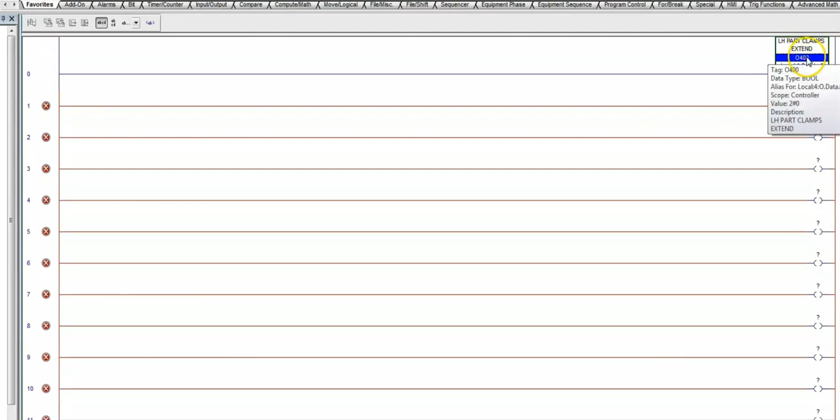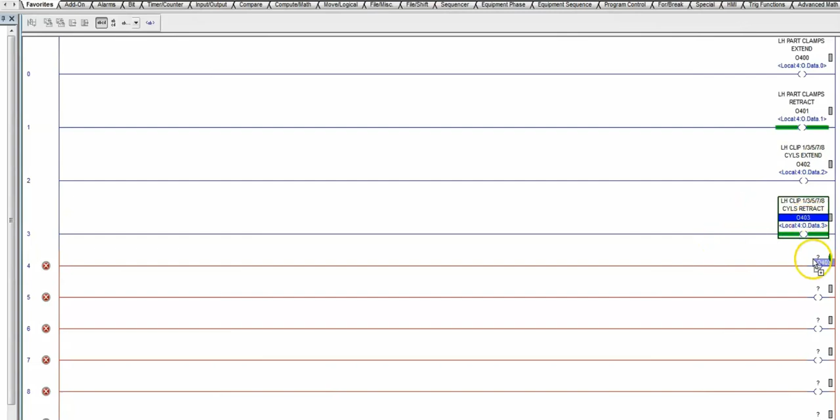The next thing we want to do is we want to address our outputs. And since we've addressed these sequentially, that makes the job that much easier. I've gone ahead and sped this up.

So the next thing we want to take a look at in our program is the first instruction on the first rung 0. So what do we need to consider for the very first rung? Well, let's go ahead and go into our projects tree and go to our main routine.

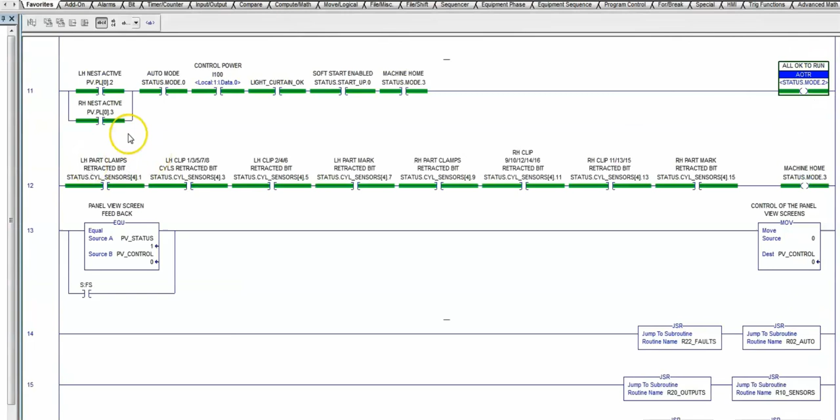And in our main routine, we have a lot of information, but we're only interested in the very beginning, where we get our power. So we have our power control input and a soft start enabled. We should begin here.

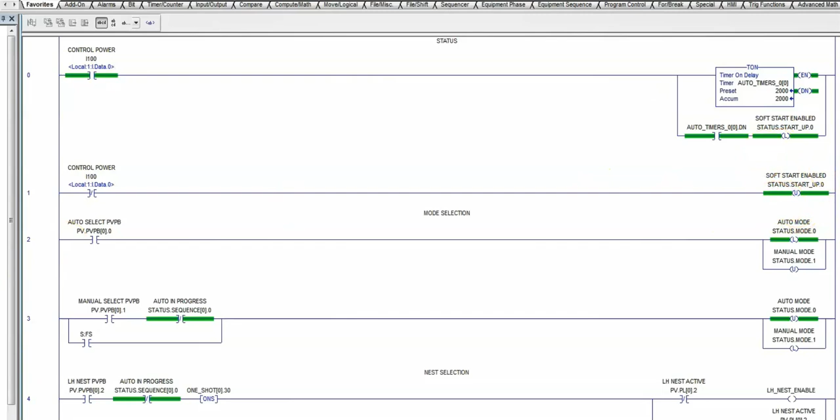The reason for that is that this soft start enabled controls all of the outputs. We will have control power to our processor and throughout our control panel, but without this input we will have no power to energize our outputs.

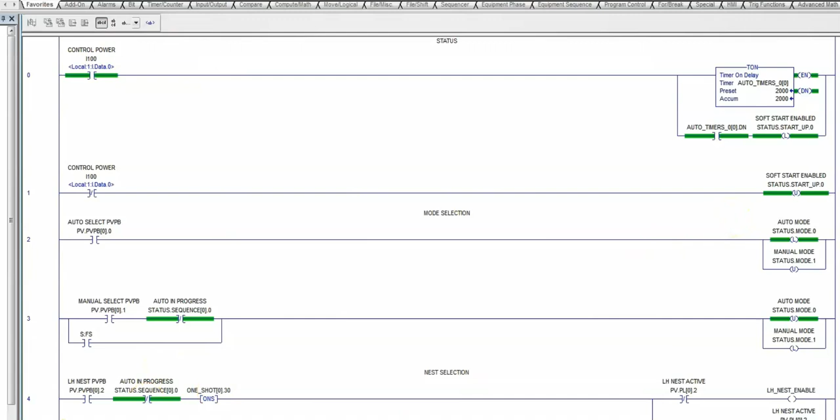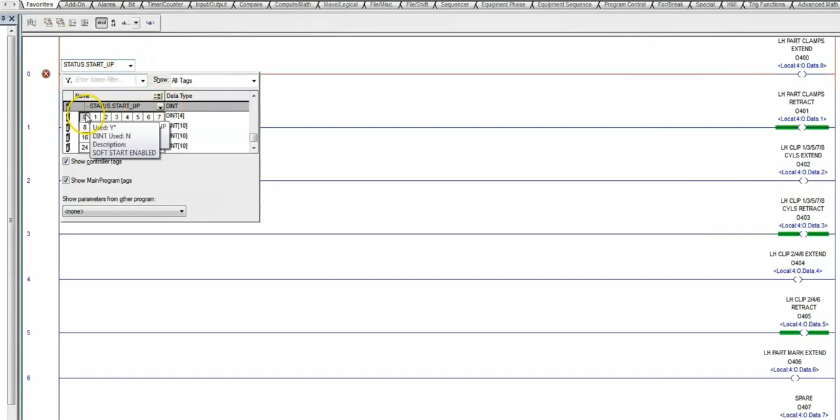So let's go back to our outputs routine and let's put in an instruction here. That is a status startup. Alright, let's find our tag, status.startup 0. Okay, that's the first one.

Now, as we've identified that is an important instruction, it will determine our ability to energize our outputs. That is the instruction that we will need on all of our rungs. So we will copy that instruction and paste it to all of our rungs.

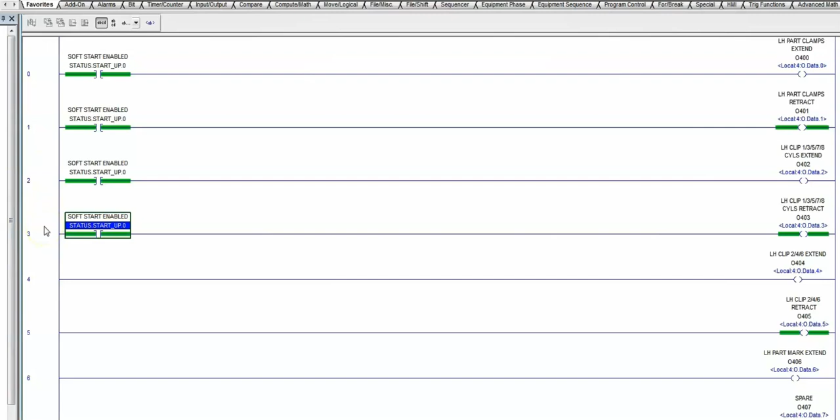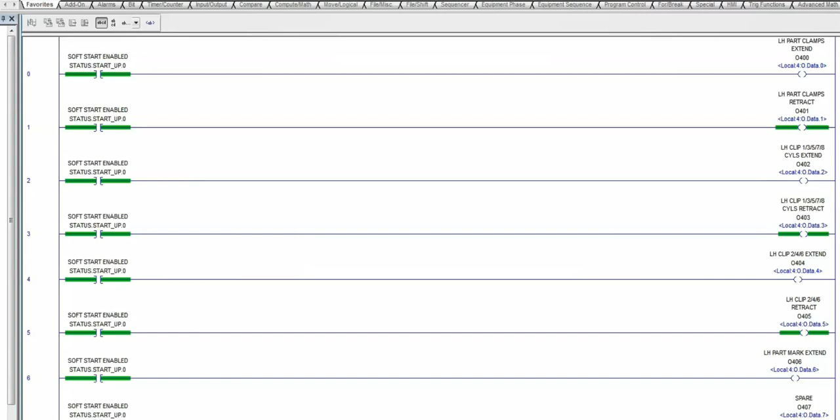Now I want to take this moment and share with you that the way that I'm building this routine is based solely on the fact that I am also trying to instruct you on how I would build this outputs routine. There are many ways to do it, and to be very efficient it would possibly be done differently. But I want to go instruction by instruction, rung by rung, and explain the thought process that goes into building your outputs routine. So let's get back to it.

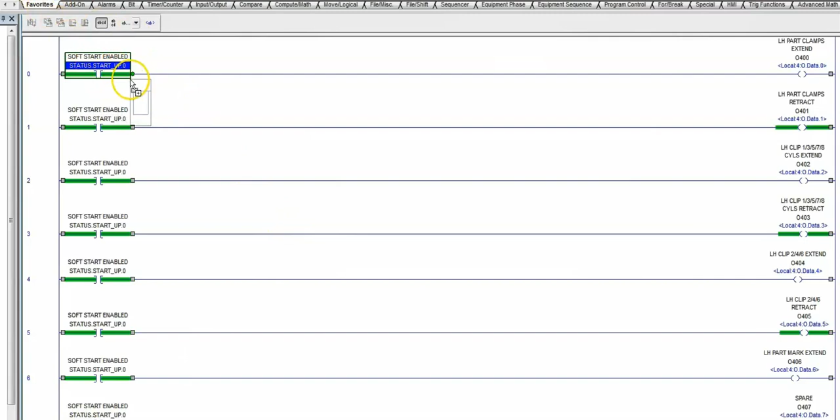Now the next very important instruction, what would that be? Well, we need to understand our machine. Let's begin by considering that we have an auto and a manual cycle. So let's go ahead and put in our manual. And that I happen to know would be PV, PL.

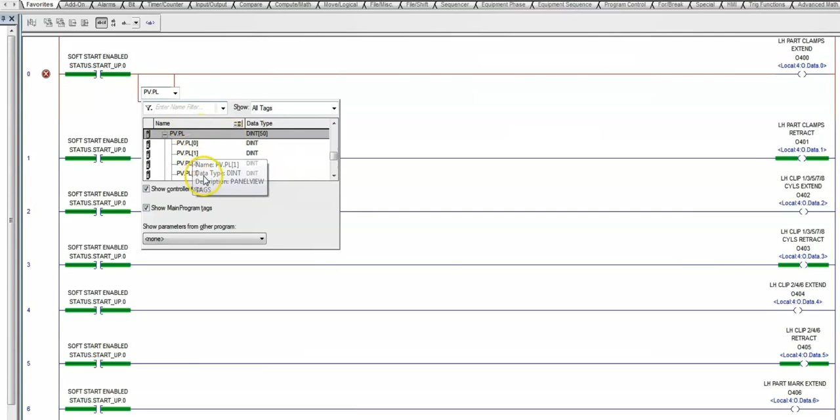This is a status bit that lets me know if the manual extend bit has been energized. Let's go with 4, 0.

Okay, what this is saying is, without adding any other instructions, assuming that this first rung is an auto rung, and we will build it to be so, that if it's put in manual, we can manually energize that bit, and another part of the program in the manual routine will energize it, and then we'll be able to manually extend this clamp. All right, so this is our manual bit.

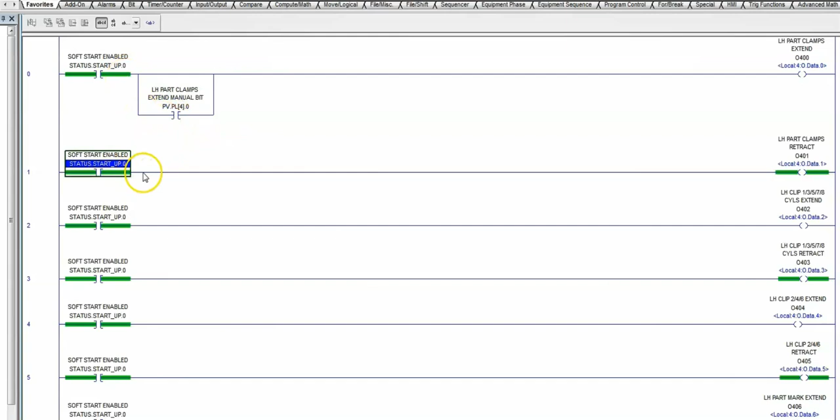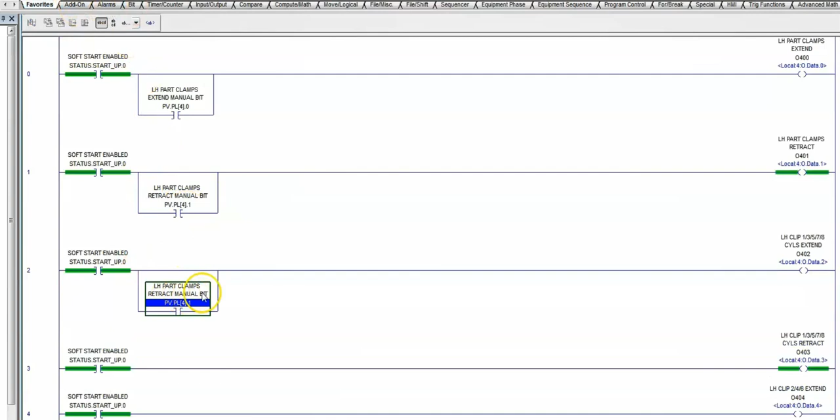This is our manual branch. Therefore, it would be safe to assume that we would have the exact same instruction in each of our rungs. Pay particular attention to the numbering scheme that is used.

I've gone ahead and sped up the process and programmed all of the manual instructions into our routine. Now, the next consideration is that we need to make sure that our left-hand nest is activated. We have made a decision to use the left-hand nest.

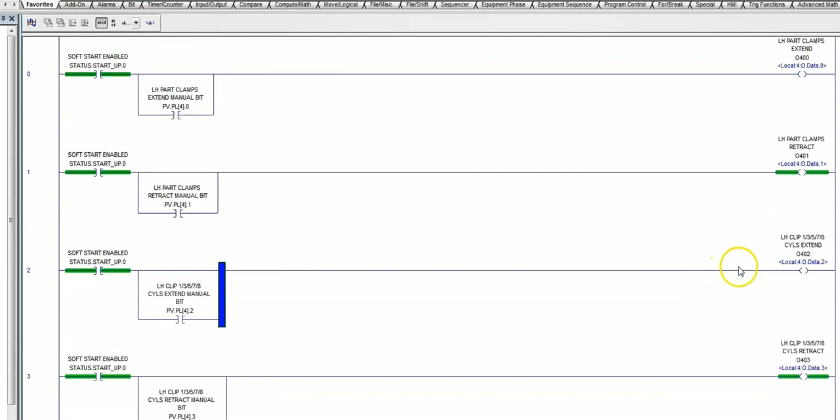All right, you'll notice that in our instructions, as you recall, we have two nests, a left hand and a right hand. So let's go ahead and get our instruction for our left hand nest. And what we're going to be looking for is our status bit for the nest. We're going to have 0.2, and that's our left hand nest is active.

Okay, now that we have our left-hand nest active, this is an auto rung, and this next section is very critical to understand, and that is that we want to only run our AutoCycle. Well, we want to run our AutoCycle in specific conditions.

Okay, one of them is we only want to extend our clamps, which is clamping the part and holding the part, when it's given the instruction in the auto sequence. So if you have considered what your auto sequence is, let's go take a look at that. Want to make sure that we're in the sequence to close the clamps, all right? And that would be all of these rungs' conditions have been met, and it's sequential.

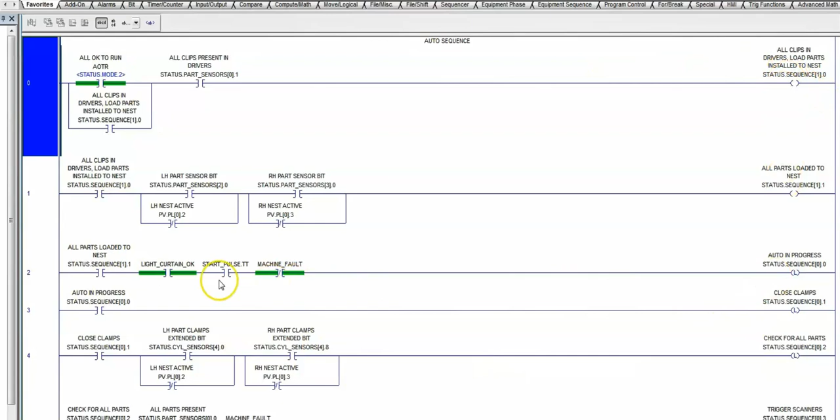We're using a status sequence latching bit to manage our auto cycle. So once this auto is in progress, that has gone high, and then we are able to close our clamps. So we want to be very cognizant of our auto cycle conditions. So let's go back to our outputs. So before we extend these, we need to make sure that our status sequence is to close the clamps.

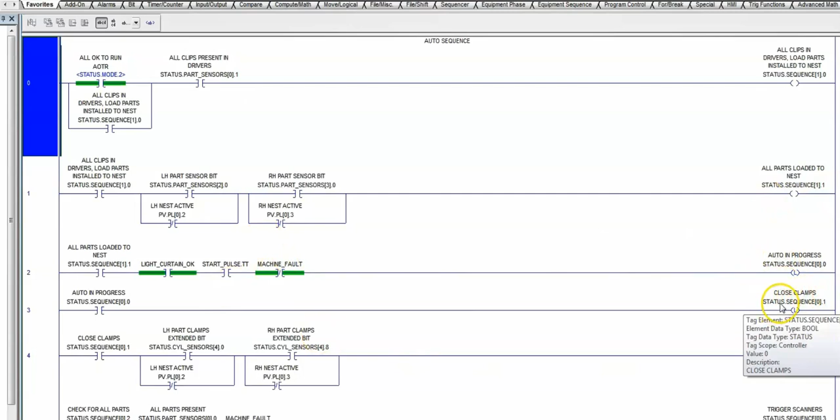And if we look back on our auto instruction, closing the clamps is right here. This is the instruction that we need to make sure that that status has been met, that it's high, before we permit this output to be energized. So let's go to status.sequence, and we'll go 0.1

and close the clamps. Now, it needs not to have been given the instruction to open the part clamps. So we have a condition so that we have closed clamps, but do not have an instruction to open the clamps. So it will stay closed until the sequence to open the clamps goes high. And we'll take a look at what that means.

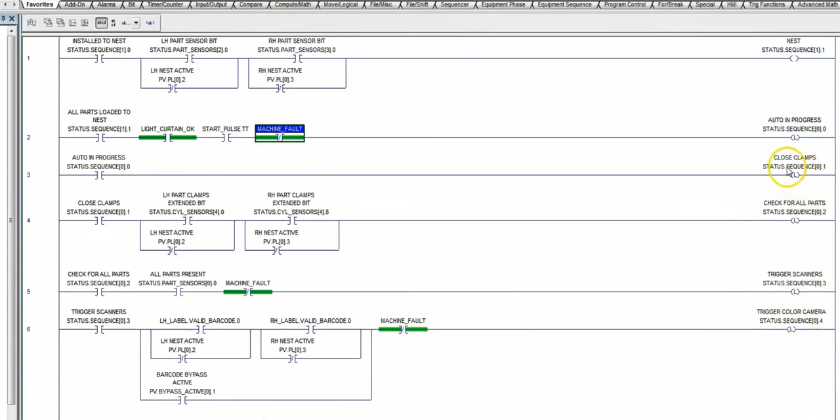If we go back to our auto routine, we have our closed clamps. The next sequence we need to consider is, when does it tell it to open the clamps? When we're all the way through all of this sequencing down here at rung 19, it says open the part clamps.

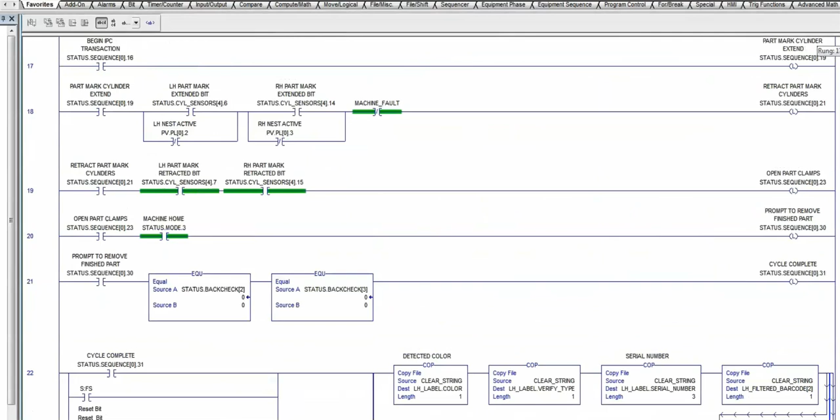All right, so we want that to be energized all the way through all of these instructions, all the way down to this routine here, where in the sequence we have completed the AutoCycle and we are now telling the clamps to open. When that happens, we want to release this clamp, okay, and permit it to open.

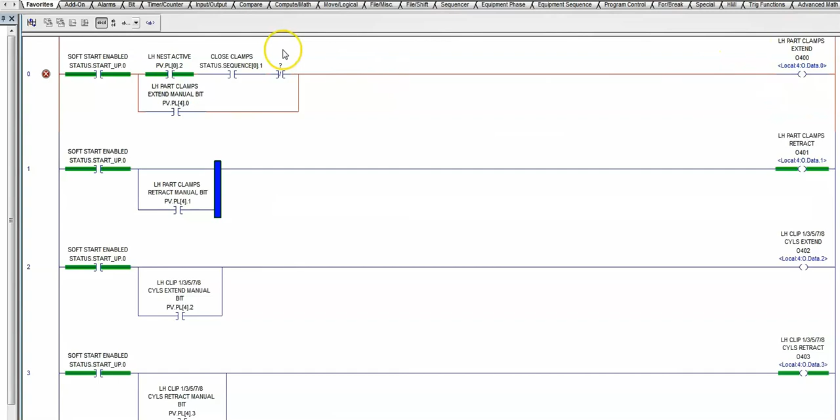So we need to go to 23. Okay, so it needs to close when we are at that part of the sequence to close, and then open when we are at this part of the sequence to open. This auto rung here is based solely on the auto routine.

Okay, and now when we look at it, we have our manual instruction down here. So now we have our auto and our manual, but are we still missing something? And I would say indeed we are. What we're looking for next is something I normally want to consider first, and that is safety. So when we are cycling our machine, whether in auto or in manual, there are a couple of things we need to consider.

In this case, we have a light curtain, which is our primary safety feature beyond the e-stop. And that would be something we need to consider. In the manual cycle, if we're manually cycling the machine, this clamp, would we want to permit the light curtain to be broken? No. What about in an auto cycle? No. But that by itself isn't always enough.

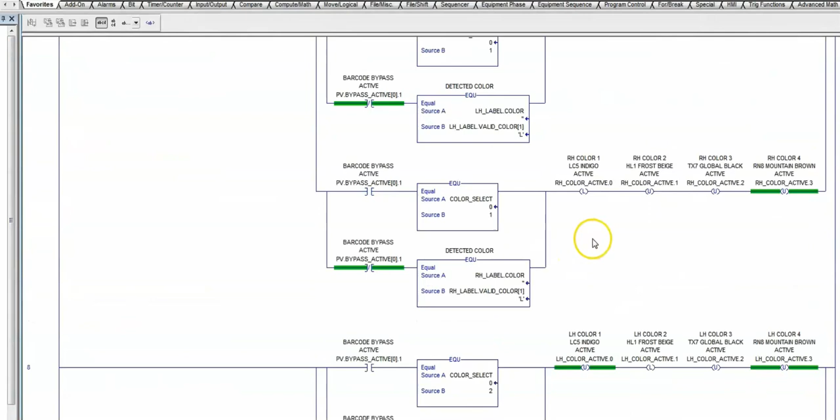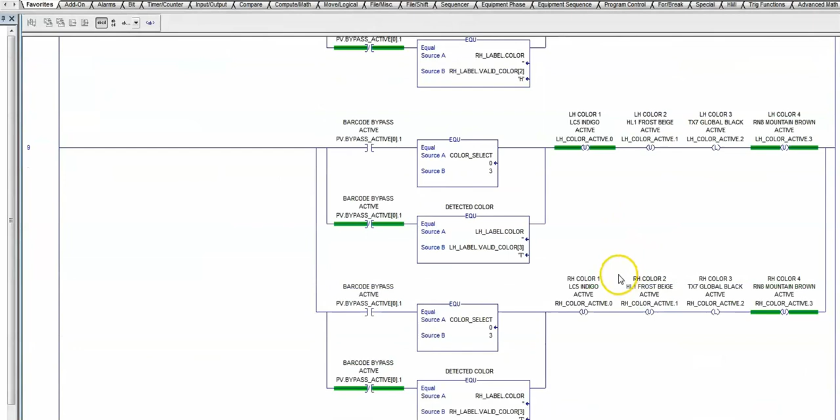So let's go to our main routine. And in our main routine, we have a rung that's called everything's A-OK or all okay to run. Let's find that routine. And that routine carries a lot of weight throughout our cycle.

Okay, obviously for everything to be okay to run, we need to have chosen one of the nests, and by default, up above on one of the other rungs, we automatically, on the first scan, choose both. You have to manually choose one of the other ones in order to not have both of them. So again, by default, we are choosing both left and right hand nest. One of them must be chosen for everything to be okay to run.

We have an auto mode. Okay, now this could also be referred to as everything okay to run in auto. We have our control power, which means we have power to our outputs. We have the light curtain, that's okay. We have our soft start enabled, and we have our machine is home.

All of the cylinders are in a home position. They are not extended or retracted. Well, depending on the application, it may need to be extended versus retracted. But in this case, all cylinders are retracted as they are supposed to be.

Okay, so what we need to look at here is a lot of these conditions. If we go to put it in manual mode and I pulled off of all of these conditions, I wouldn't be able to manually move it because it would need to be in auto. All right, the light curtain is okay, meaning it's not broken. Okay, so these are some of the considerations you need to consider.

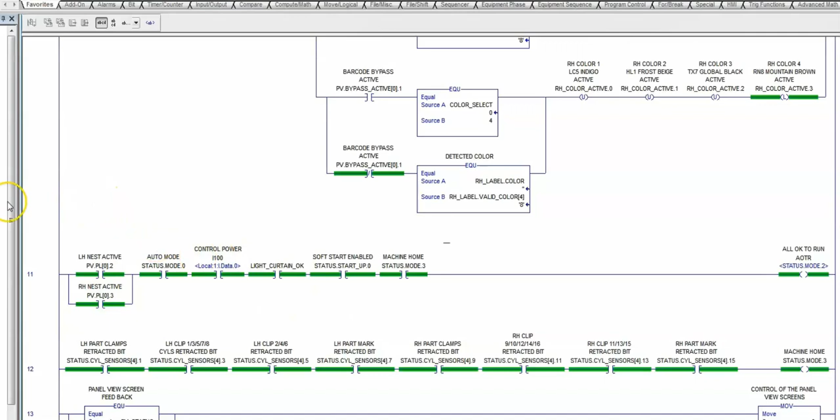If all of the cylinders are not home, and the way we would know that is we would have our inputs indicating that they're all home, then we wouldn't be able to manually move them at all, even in the retract. So if they're not home, we cannot use this, and we need to consider exactly what we need to add to our output rung to consider safety.

So an item to consider is the light curtain. Okay, we don't want the light curtain to be broken. We don't want anybody within the light curtain or within the safe space of the machine, whether it's in manual or in auto, and that's an irrevocable fact. For manual and auto, that's something we definitely want to consider when we're writing our program.

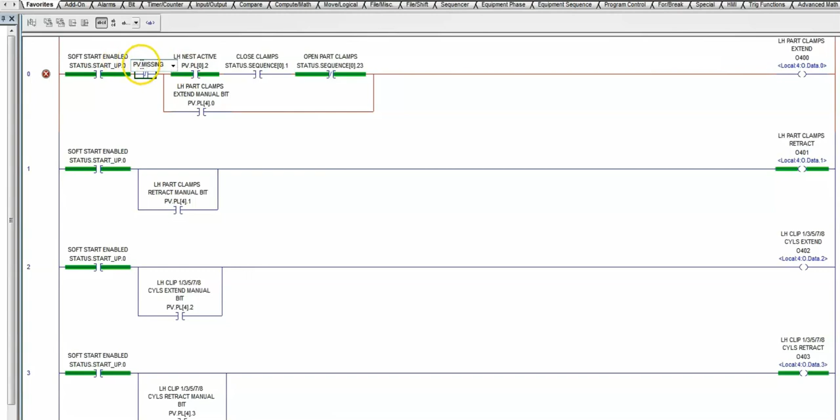PV missing. All right. PV missing. We got 1.1. And there we go. So that's a condition we want to have. Now, when you think of all the other conditions that I outlined, light curtain is very important. We have our soft start, so we have our power to energize our outputs.

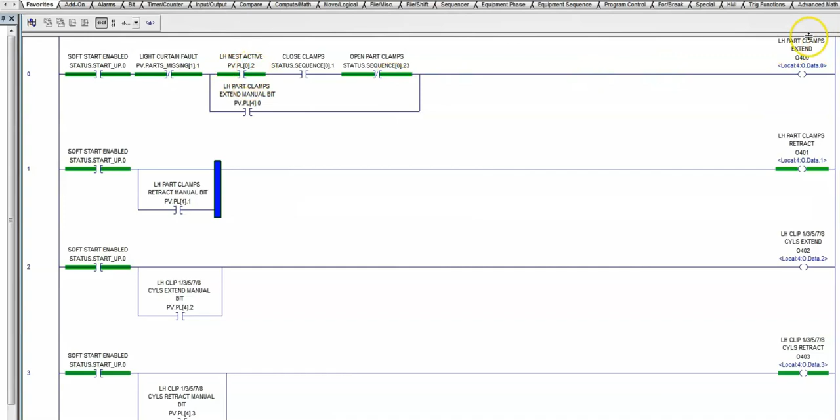We have an irrevocable safety condition, whether it's in auto or manual. We have our left nest has been chosen. That's important because it's a left part clamp. In this top rung, we're dealing with our AutoCycle, so between 0.1 and 0.23, we want this fully energized in the auto routine, and or we drop down here and we can manually energize it. There is the thought process for this first rung.

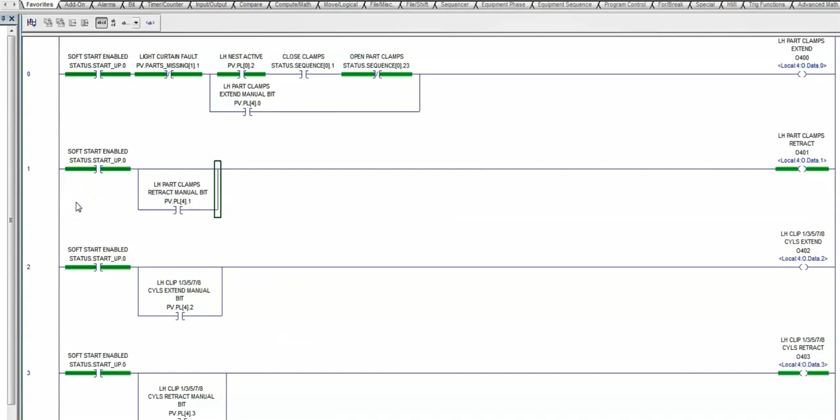Now I'd like to walk through the second rung. And then what we will find is all the subsequent rungs will essentially be the same as these two rungs, because all the rest of them have an extend and a retract. As we have here, left-hand part clamps extend, left-hand part clamp retract. And we have the exact same thing for every cylinder as we move through.

What I wanted to share with you primarily today is the thought process behind writing this routine. So let's go ahead and get started. So now obviously we're back to our light curtain condition. Okay, that must be there. Now, to retract it, right? To retract is a different thought process to a degree than extend.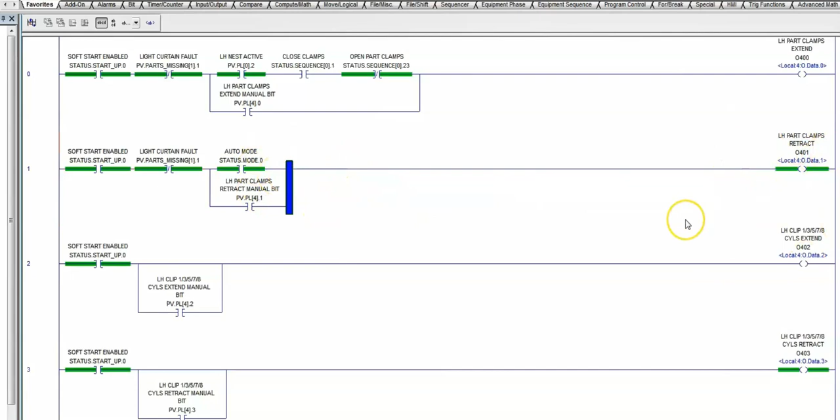And that is, we have our manual mode here, right? But we also need to say, hey, you need to be in the auto mode to be able to retract this. And we'll talk more about that in a minute. All right. Okay, so now, in the auto mode, the next process really is thinking about what is the condition that will require us to retract the clamp, okay?

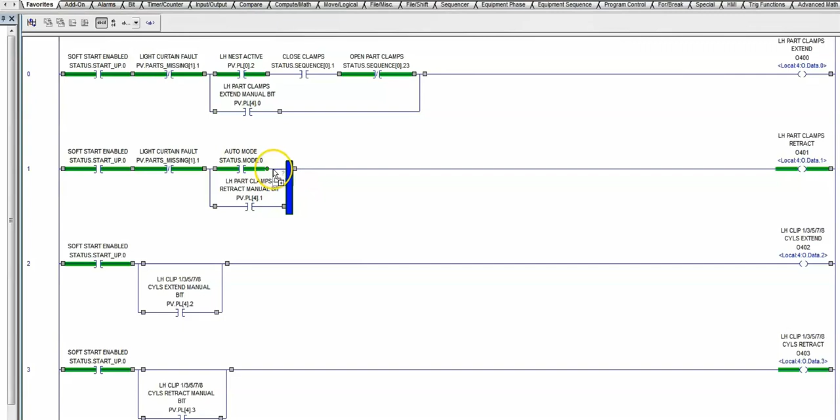So one, it needs not be energized, extended, right? So we want to put that in here, right? And we want to say, hey, if it's extended, do not retract. Now, for it not to be extended, we need to not be in either of these two conditions here, okay? Very important.

In the auto cycle. In the manual here, this is a momentary button. This will only energize as I am pushing the button. When I let go of it, it will then de-energize this output. Now here, I want to make sure this is de-energized before I go to retract. If it's in auto, in between these two, and I go to manually retract it, I'll have the cylinder fighting itself. I hope that makes sense.

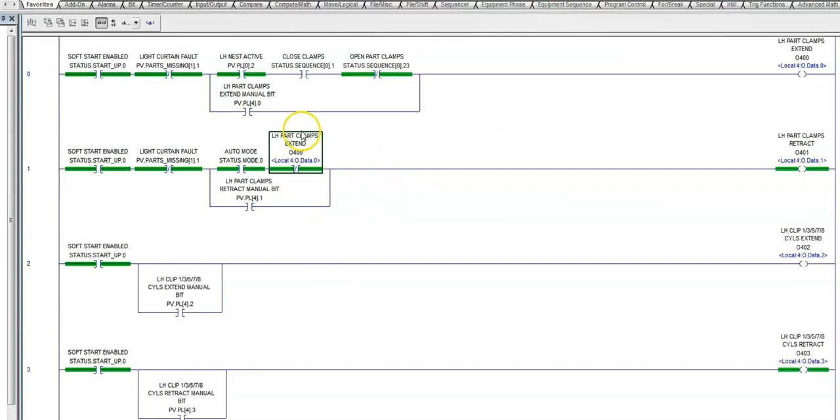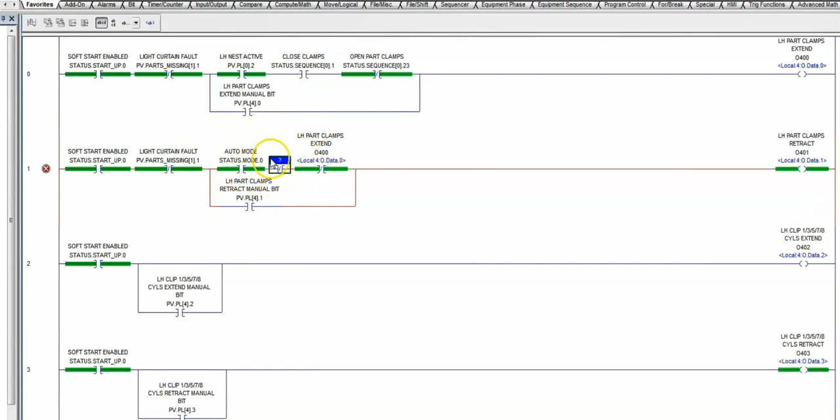All right, the next thing to consider is under what circumstance will we need to retract this clamp, right? And that's to home it. We need to bring the cylinders back to a home position. We've made that condition a requirement in our project, right? So we're going to put this right here. So if it's in auto mode and it's not fully back and the left-hand clamps are not extended, then we'll go ahead and retract. And we'll talk about the homing instruction here in just a minute.

Let's go ahead and get this in here, and then we'll take a look at the homing routine. So in the homing routine, what we have is right here, homing reset active. In auto mode, if the machine is not home, it will retract the cylinders. As soon as we gain control power, it will retract the cylinders. If there's a reset, it will retract the cylinders. And this branch down here is just to hold it until these conditions change. As soon as one of these conditions changes, then this will drop out.

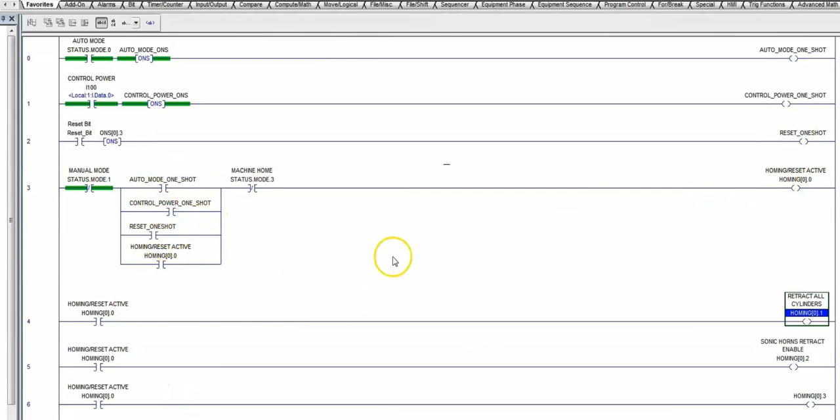All right? So let's go back to our outputs routine. In our outputs routine, we're saying if it's not homing, go ahead and retract it. All right? I hope that makes sense. So let's review these two rungs, because essentially the rungs following this are virtually identical.

Okay, so as soon as we get our control power, we have that soft start enabled, that goes high. The light curtain's not blocked, then this will remain true. The PLC nest, as soon as that left-hand nest is active, and if you recall, on the first scan, both the left and right-hand nests go true. We get a command between the sequence here, the command to close the clamps, but it has not reached sequence 0.23. Go ahead and extend it.

Or, as we come down here, if we get a manual instruction, a momentary push button that tells the clamps to extend, then it will extend. Now, in order to retract that cylinder, we would have, again, the soft starts, our control power, the light curtain is not blocked, it's in auto mode. The condition for homing and reset is not active.

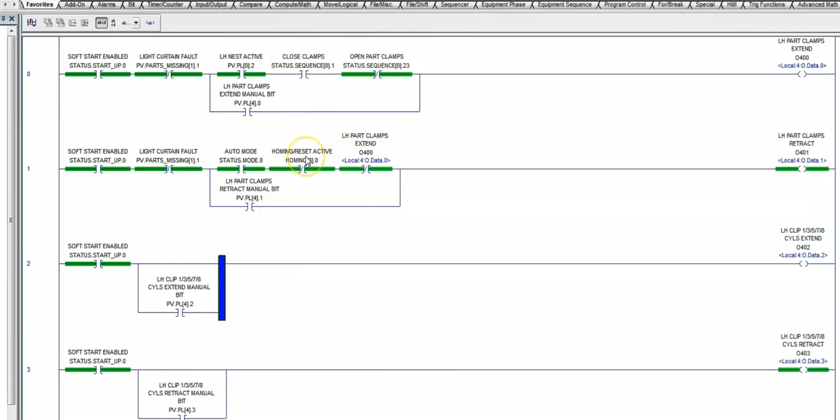So that means those conditions we talked about in auto mode, first scan, reset, all those conditions are met, then this is going to pull those cylinders back, right? That'll say go ahead and retract these cylinders if these conditions are not met. The left-hand parts are not extended, so these two need not be the same. Then go ahead and retract the cylinders, or go ahead and retract the cylinders if it's a manual instruction.